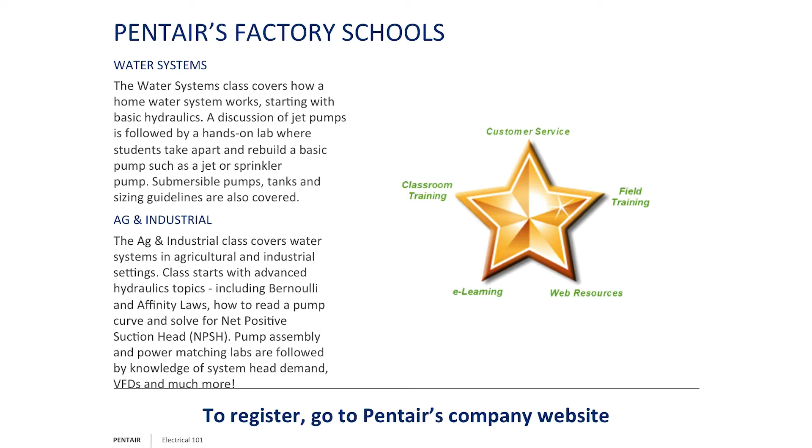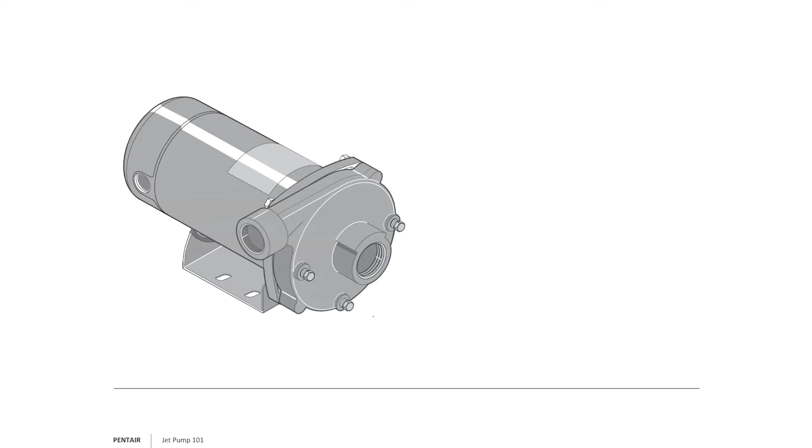Talking about jets now, let's get into the heart of it. One of the things I tell people is it's a two-pump system. You have your centrifugal, which has the impeller that moves the water. The impeller imparts velocity, and the volute case or diffuser then imparts pressure by changing that velocity. We all know Bernoulli's law: if pressure goes down, velocity probably went up, and if velocity goes down, pressure goes up. It's an inverse relationship. Remember that, because part number two to a jet is the jet package. A lot of people think this is a booster only, but understand this is a pump in and of itself. I'll highlight that later when we talk about a tailpipe.

One of the things a lot of people comment is that jet pumps are inefficient, old technology, blah blah blah. Well, one, they do serve a practical purpose -- we just talked about boosting, for example. And two, yes, they do sacrifice water to produce pressure.

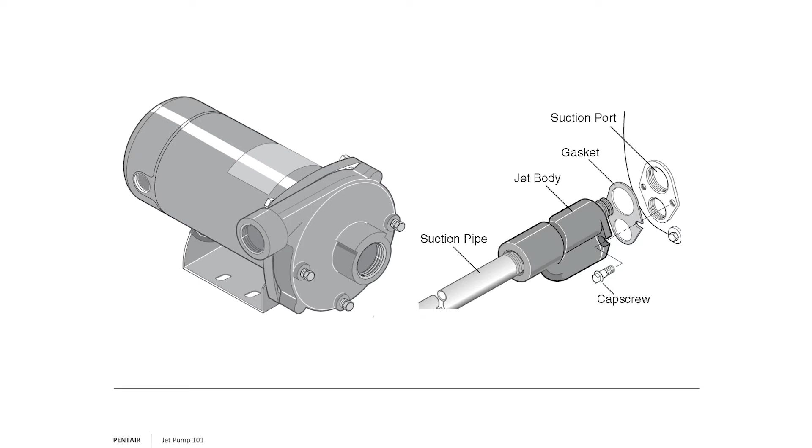Let's explain this. First, I want to differentiate between shallow well versus deep well. For shallow well, because of atmospheric pressure, we can only pull from a maximum of 25 feet. Now, I've heard some people say 27 feet -- that's fine, I'm a conservative guy, anyone that knows me knows I'm pretty cautious. So I recommend 25 feet or less.

Often the nozzle and venturi with a jet pump is built right into the pump -- sometimes it doesn't even look like one. I know one of our retail divisions, Simer, it was very hard to tell it was a jet pump; the jet was actually sideways in the body. So often the venturi and nozzle for a dedicated shallow well will be built in. If you're using a convertible pump, meaning it can be used as deep well or shallow well, make sure you have the right nozzle and venturi combination. You have to pay attention there.

Now, the other thing to remember about a shallow well pump is you really don't need that recirculation valve -- in fact, you leave it full open during shallow well applications. I've even had customers damage them -- they're plastic, I admit it freely. And if you damage them, don't sweat it. For shallow well, you can just put a pipe plug in there, don't worry about it.

When you're talking deep well, remember you can pull from greater than 25 feet, but it's going to use nozzle and venturi. You have to make sure the nozzle and venturi are selected properly for the pump, the depth to water, and the horsepower -- there are factors to keep in mind. Priming will be more difficult, and you will definitely have to use that recirculation valve. When in doubt, read the factory manual -- RTFM.

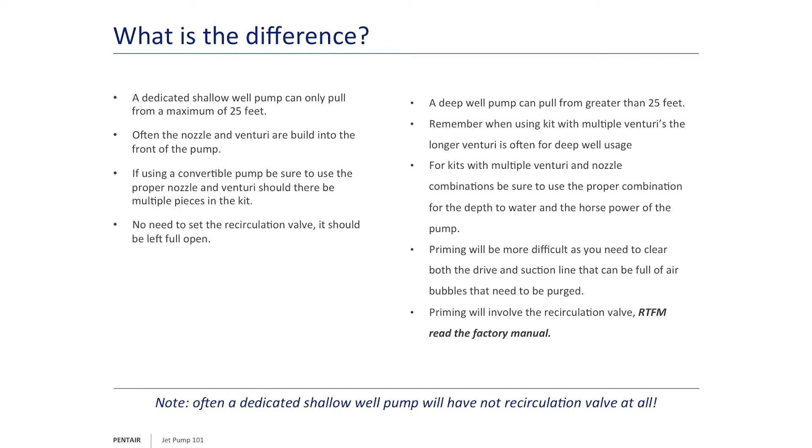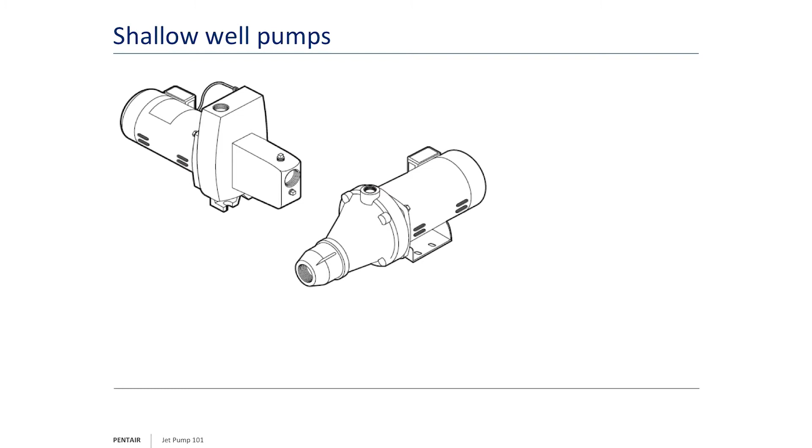Okay, now let's get back to shallow well pumps. Like I said, shallow well pumps often have the jet built right into the nose cone -- you won't even notice it. These little snouts sticking out are where the nozzle and venturi package is buried. For a convertible, on top you'll see the pressure gauge, to the right the discharge, and further right the recirculation valve, which you'll have to use for deep well, but as a shallow well you'd leave it full open. The package then bolts to the front of the pump, making that pump, until you put a package on it, a straight centrifugal.

A little note here too -- I had a customer one time who was burning up centrifugals, and it was because he was pulling water from an open body of water to a tank to recirculate it through a cooler, a geothermal system basically.

Every now and then, because the water level would get a little vortex in action, or might be low enough, or there might be some wave action, the pump would pull air, and with a straight centrifugal, it would lose prime very quickly. So what we recommended was, instead of using that little J series, switch it over to the SL series. If you don't put the nozzle and venturi in and just plug off the 1-inch, you now use the 1-inch for suction, and you basically have a J series, but the neat thing is it's now self-priming. Because you went to the S or SL series, now you have that big head shown here that has a little body of water over it, so it can recover should there be a little air or vortex in action. Makes it a better pump in that circumstance.

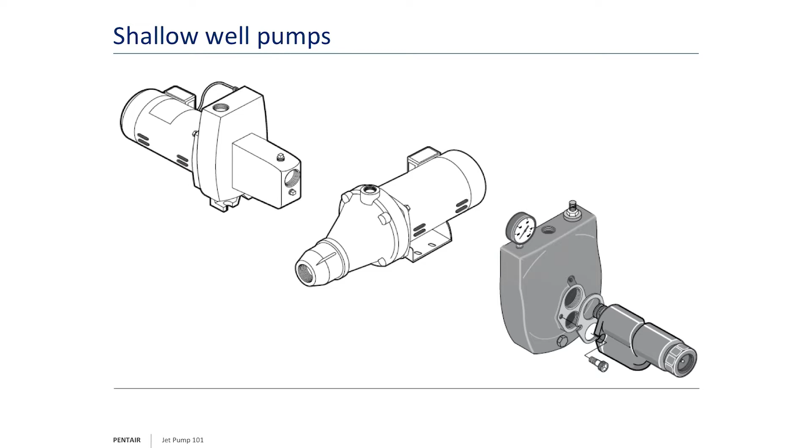So it's interesting how customers use our pumps. I always found that very interesting.

When you're talking about a jet pump, why is it so efficient? If you follow the arrows here, you notice that a portion of the flow goes to the nose cone and does a U-turn into the nozzle. At the nozzle, it's kind of like the thumb over the hose trick. It pinches the water, squeezes the water flow off so that the water jets through the next section, which is your suction, at a high velocity.

Now remember, I spoke about it earlier. Bernoulli's law says if velocity goes up, then pressure must go down. So we create a low pressure zone there that helps draw the water in more efficiently.

Then it jumps the gap, and that stream of water goes into a venturi. The venturi is kind of like a trumpet, where it starts very narrow and gets wider the closer it gets to the actual impeller. As the water travels through there at high speed, suddenly the passage opens and it can slow down. And remember what we just said, opposite relationships with Bernoulli—so if the velocity is allowed to go down, pressure goes up.

So what a jet package and a centrifugal pump are doing in connection with each other is you're sacrificing the flow—it could be as much as two-thirds of the flow. But you're sacrificing that flow to send the water down through the nozzle, jump the gap into the venturi, and effectively you can often triple the pressure or more. You can build much more pressure and pull water from deeper depths, as in a deep well example. We'll give you a better example of deep wells and how they work in the upcoming slides. So the reason we're doing this is we're sacrificing flow to build pressure.

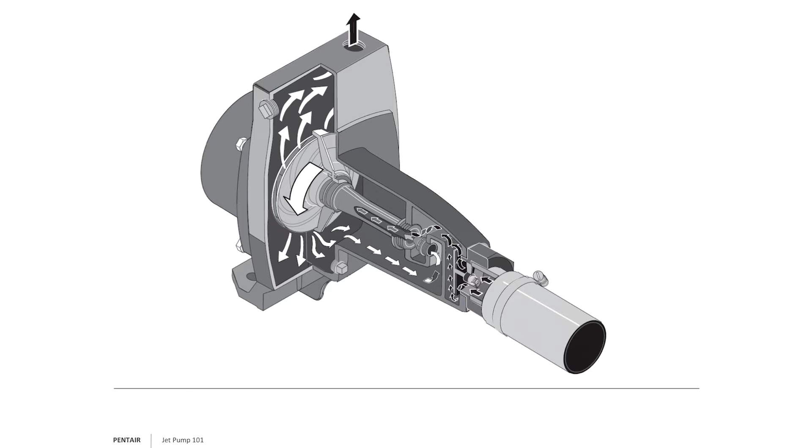Looking at the side view of a jet, you see the darker arrows at the very bottom flow from left to right, doing a U-turn into the nozzle. The arrows show how the nozzle had a higher flow at a slower rate, and they're pinched off by the nozzle, so they flow through at a very high rate of speed, creating that low pressure zone, which then pulls water in and pulls the check valve. It then goes through the venturi, which starts out kind of wide to catch the flow, but pinches off very quickly and then reopens like a trumpet to allow that water flow to go slower again. Remember, if we pinch off the water and have high flow, we create a low pressure zone. As we go into the venturi, we do the opposite—high velocity turns into lower velocity, and the pressure thus must be boosted. That's how that works.

Now, points for troubleshooting. With a jet pump, if you get it out of the box brand new, install it, and it's only building about 25 pounds of pressure, the first thing I'm going to ask you is check your voltage. Because remember, the pumps come pre-wired 230.

If you put 115 into a 230 volt motor, it runs half speed at best if it doesn't trip the thermal overload, and it only builds about 25 pounds of pressure.

Now, if the voltage checks out fine and we're still convinced that everything's plumbed properly, then if the nozzle is blocked, we're not pinching the water anymore. We're running a straight centrifugal basically. The water will still possibly flow into the pump because remember, a centrifugal pump can pull water too. It doesn't need the jet to do so. A centrifugal by itself can pull water, but it won't build pressure.

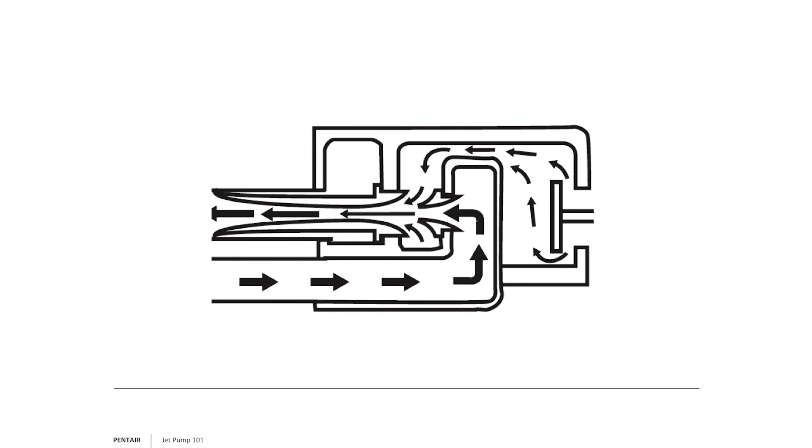So that's a tip: if you have a pump brand new out of the box, first check your voltage, then check your venturi. If this is an existing pump, say you're firing up for the 5th spring, you've had it in there for 5 years, this is your 5th season going on, you fire it up, you just can't get it to prime, you can't get it to build pressure, there's no air leaks, you've checked your voltage, everything's fine, then most likely your nozzle is blocked.

A lot of wells were produced this way with pile drivers, and they just pounded the 2 or 3 inch casing into the ground.

Now, one of the comments I'll say about this is that these are often not allowed because bad things can happen very easily. What I mean is, in one state that allows it, Wisconsin being one of them, you can still buy these at the local farm and barn type of stores. If the local code permits it, they sell them, meaning anybody, including the average homeowner, can buy one.

We literally had a homeowner that bought one of these and then was complaining about how the water was poor quality, it was even testing bad. When we asked him enough questions, we found out that this man took the driven point and drilled it into his backyard, and guess where his leach field was for his sewage system? In the backyard. Guess where he put the point? Right in the middle of the leach field, because it wasn't that far down before he hit water. So that's why a lot of codes do not permit these anymore.

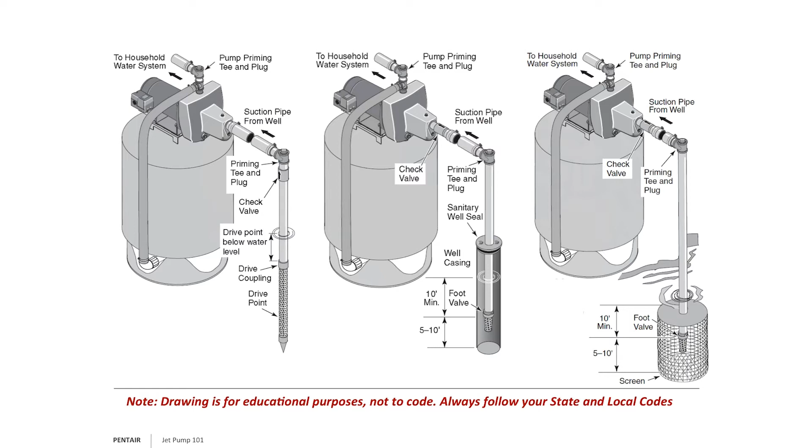Why wouldn't you install one? One customer said, Dan, you know it and I know it, I can pull out your catalog. The maximum pressure that S-Series pump can build is, say, 72 psi. It will never hit 75, which most pressure relief valves are set for, and below. So why should I install one? Very simple answer: CYI, cover your interests. You've got to protect yourself.

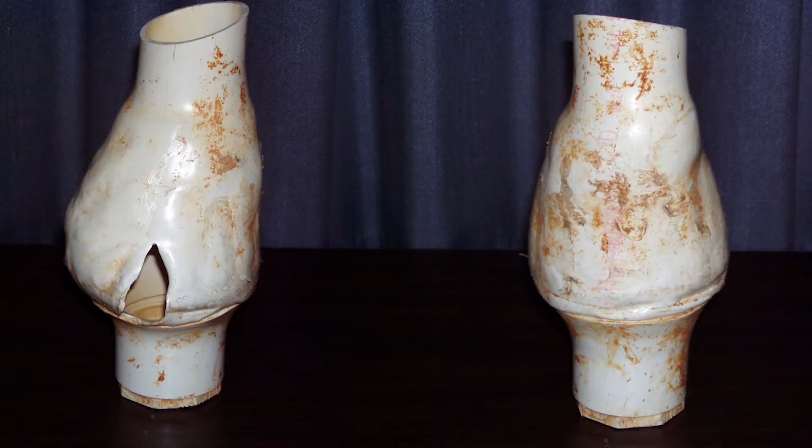Meaning this: the pump could go into a runaway condition. Initially it will only build about 72 pounds of pressure, but left unchecked, you can form steam in a pump like that. I know a lot of guys would tell me, no, not that much. And I know all of us have seen those pictures of PVC blown up like a big balloon before it blew out and the water escaped. Imagine how much pressure and how much heat is involved in there. That pressure relief valve better be there.

Because here's the simple reason why: are you going to feel ridiculous going in front of a judge and saying, Your Honor, I didn't want to spend the $5-10 for a pressure relief valve to protect the customer's home, I didn't find that worth the investment to make? Because that's basically what you're telling me. For the $5-10 that a pressure relief valve costs, it's cheap insurance.

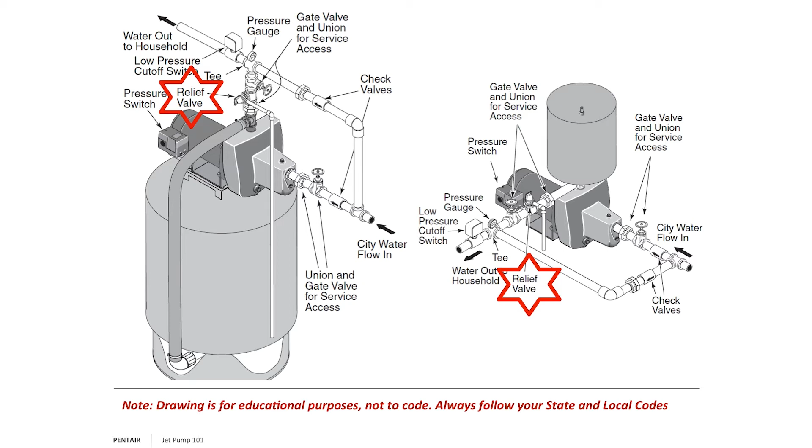Install them, even if the pump is outdoors. When I teach or I'm on the work site, I'm always telling the customer pressure relief valves, okay? Because the bad news is every year more of those things called lawyers graduate from college and they make money suing us. So let's just do that simple thing.

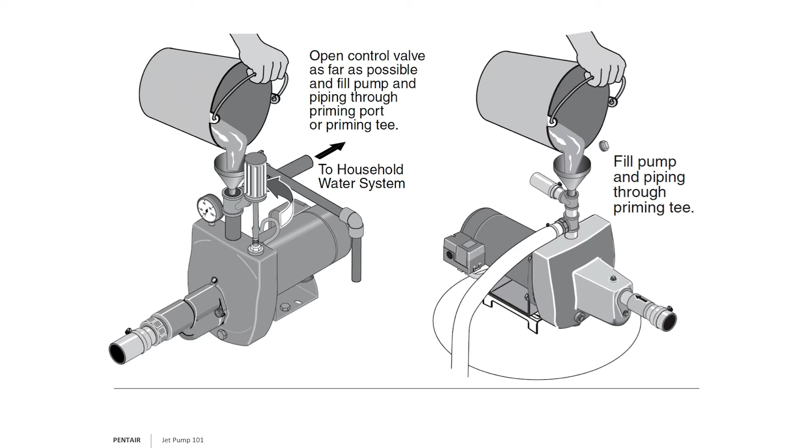One quick caution: when you prime, don't be surprised for the pressure to jump up to 50 and then drop down again and not build pressure, because often you're cleansing the pipes, pulling all the air out. It's like when you draw water from your ice maker in the refrigerator, and the glass, which is smooth as silk, you think, has all those little bubbles stuck to the side of it. Same thing happens here too.

So it's not uncommon that you lose pressure, stop it, open up the pipe plug, and the air that's trapped in the water will be whipped like whipped cream. So you'll open it, see that little white foam, pour water in until it's gone, reseal the system, and she should prime up again, no issue.

Now, you're probably wondering, why do I keep talking about multiple nozzles and venturis? Depending upon the manufacturer, Sta-Rite and Berkeley, for example, we have the CK packages. The CK package was named after a young man hired by us years ago named Corey Coles. Corey Coles was hired for the sole purpose of looking at our jet packages, which we had a huge number of, and trimming them down. What do we really need? What he found out was with a combination of 2 or 3 nozzles and a combination of maybe 2 to 5 venturis, he could cover a larger series of pumps. For the cost of those pieces, put them together in a big package with proper instructions on which nozzle and venturi to choose for the pump you're using, and sell them that way, so we had less jet packages on the shelf.

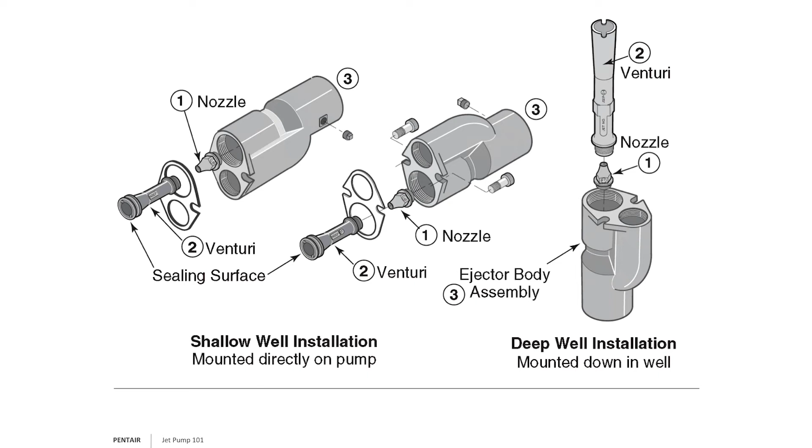Because if you can imagine, if that venturi's been in the water for some time, there's some lime and scale buildup material that might make it hard to break free the venturi. Now, I know one customer said, but Dan, there's a nut. You can plainly see it in the drawing. There's a nut molded into it where you can easily put a monkey wrench or a pipe wrench. And the answer is, yeah, you could do that too. You could do that too. But we give you a couple options on how to remove it.

Looking at the proper flow with a deep well now. And it's true with the shallow well too, but this is a deep well application we're showing here. We have the 1 inch line where the water is flowing down. That water comes flowing and crashing down and makes a U-turn, and then is pinched into the nozzle where it's forced to create high velocity.

We increase the velocity, and that makes a low pressure zone in the jet package, which creates suction and draws water in. Then that water at high velocity is shot through the venturi, which has a large opening to catch the water, but is pinched off properly to match the flow, and then opens up. That trumpet shape goes from narrow to wider, allowing the water to slow down again. Remember, velocity goes down, pressure goes up. Plain and simple, okay?

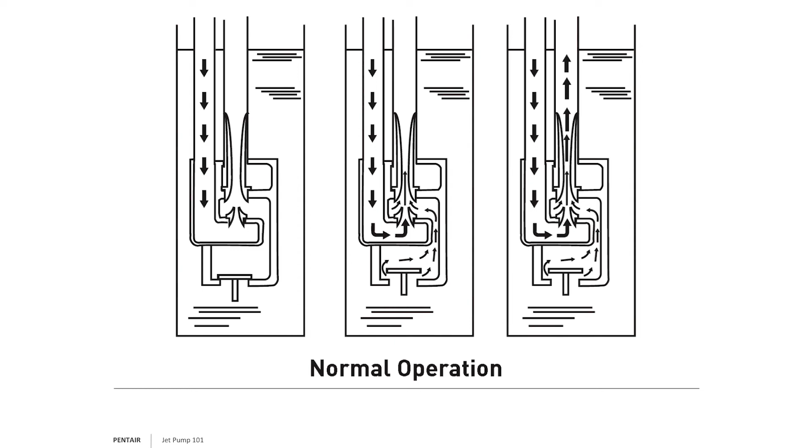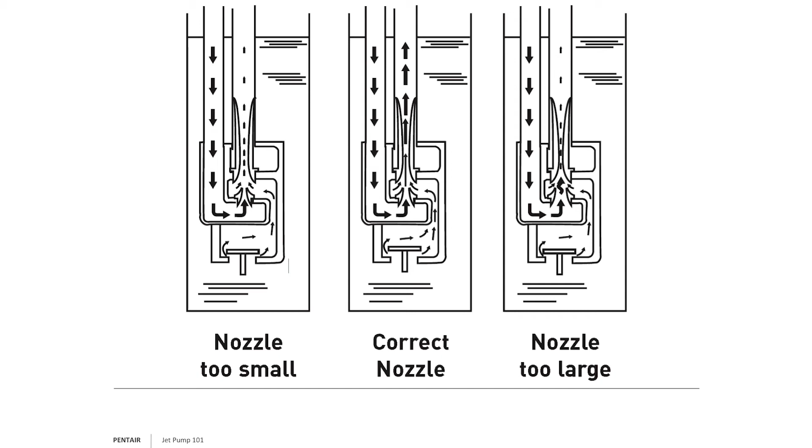So if you're not building pressure, okay, and especially if this is a brand new installation and it's a CK package, or whoever's manufacturer you're using, it gave you multiple options, read that factory manual, okay? Read the manual, because I can't think of a company that just gives you parts without any instruction. At the very least, you would hope they would give you a YouTube video or a website to go to get more information if they don't give you the actual instructions.

Looking at how these are installed for a deep well pump. The drawing to the left shows a 2-inch well package and a 4-inch well package. If you have a 2-inch or a 3-inch casing, congratulations, you have a 2-inch or 3-inch well package going down there. You're not going to get 2 pipes to go down there. And what I mean by that is physically - we have a better drawing of the single pipe 2 and 3-inch diameter on the far right here. So let's look at that drawing. What I'm telling you is there's no way I can get a 1-inch and a 1.25-inch pipe down that 2 or 3-inch pipe.

So what happens is, on the top, we have a 1.25" suction pipe and a 1" drive pipe that goes into a special elbow fitting, which connects to the top of a 2" or 3" well package system. And it uses the well casing itself as the drive pipe. So that 1" pipe flows into that elbow, and then water is allowed to flow around the suction pipe, but it's contained by the casing, and the water is driven down, does its U-turn at the jet package, comes up, and the suction pipe is now that 1.25", which is dead center, drawing the water up back into the pump.

Now, the thing to understand about a 2 or 3" jet package is they have leathers. Leather, when you put it in water, swells. So that jet package that's down there has these 2 leather cups that, when immersed in water, will swell and seal themselves off, meaning that anything above the leathers is the drive pipe that the water will come down and be forced to go into the jet package. Anything below the leathers is suction, that's the suction pipe. And you can even put a tailpipe and draw water from deeper depths - I'll highlight tailpipes here in a moment. So I want you to understand that those leathers are sealed off in place.

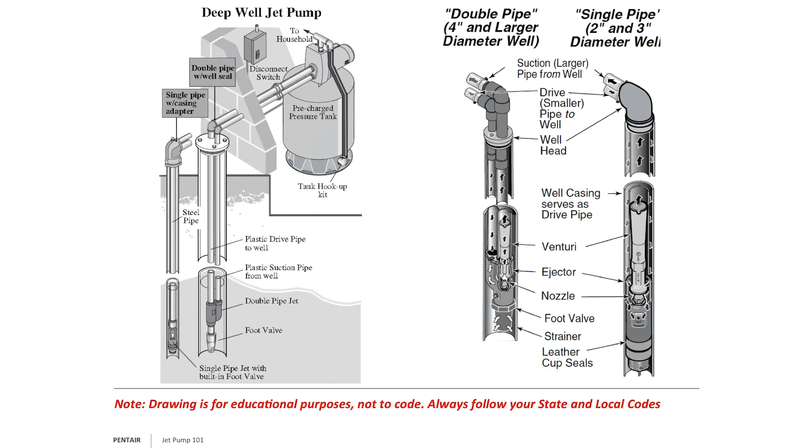Again, not to beat a dead horse, so to speak, make sure you install a pressure relief valve. I understand that most jet pumps don't build a lot of pressure, but when they get into a runaway condition, they do.

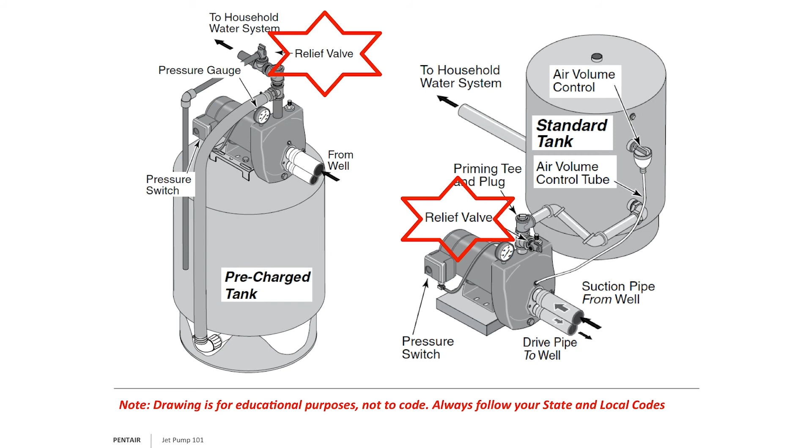Also note we do make pumps that are shallow well and convertible. The MS series, that's a deep well shallow well convertible, and the HS series. These actually have multiple impellers, remember, which means they do build over 75 pounds of pressure. So I would be cautious.

When you're priming a deep well pump, you take that priming plug, and ideally in this case, because you're filling up both pipes, I would have one at the wellhead if possible, so I'm filling out there plus inside. The key to remember is make sure you have that regulator valve open.

If you see that diagram with the screwdriver there showing you loosening the regulator valve, which you do need for a deep well, that regulator valve does two things in a deep well pump. It makes an isolation chamber so we can circulate water and get the air out, because it pinches off the flow, and it also isolates. You see that hose there? It isolates the pressure switch.

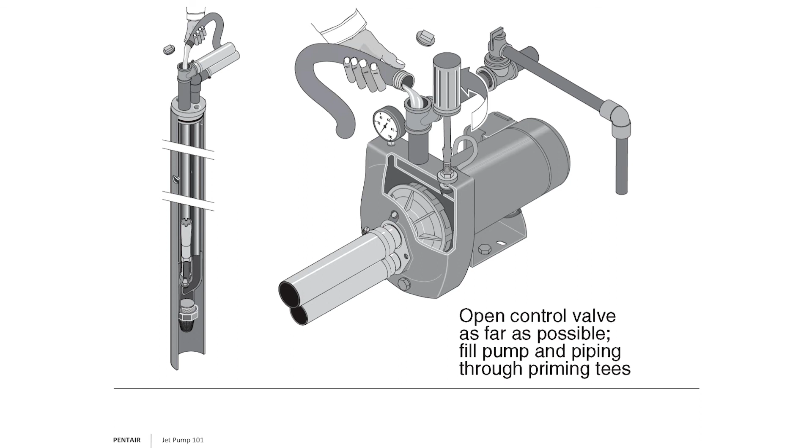So when we're purging the system and trying to get all the air out, we close the valve down here, which I'll show you in a moment. We effectively have isolated our pressure switch. So we fill the pump with water. We have that regulator valve open to make sure it flows all the way down. We then close that regulator valve, and you're going to start the system.

And you're going to start to circulate the water. Ideally, you want to see the pressure shoot up and stay up. But often with this type of system, you'll see the pressure jump up to maybe 50, 60 psi, and then it just loses the pressure, because you're flowing water, scouring out all the air bubbles, and whipping that air, and air compresses very easily.

So what you have to do is turn the pump off, take your priming plug out, open up that regulator valve, and that milky white froth, that's the air. You're going to pour more water until you get all that out, purge it, turn the regulator valve back down all the way to seal it off, put your pipe plug in place, turn it on, and it's going to build good pressure. That's what we're looking for.

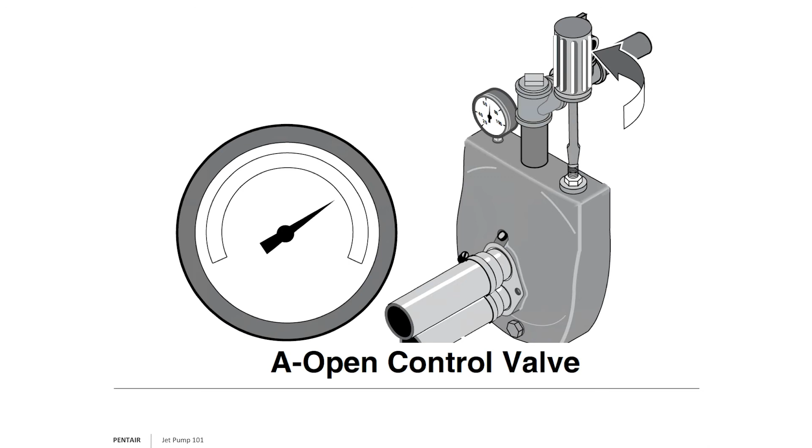You want to shoot right up to maybe 55, 60. When you see it's holding, it shoots up and doesn't dive right off again, then you start to open up that regulator valve slowly by turning it counterclockwise, to the point where you want to see the pressure gauge needle start to bounce and vibrate. That tells you you're at the sweet spot of flow, and you give that regulator valve a quarter turn to seal it off.

Now, I'll tell you my experience, and maybe it's because we're in Wisconsin, we don't have very deep wells. What we do is open it, and if we open it all the way, we have an amp meter ready, and we read the amps on the motor. If, for whatever reason, you can open up that regulator valve all the way, and you're still drawing water, and still hitting 50 psi and turning off clean, because you're really not that deep of a well, check your amps, make sure you're not overamping the motor.

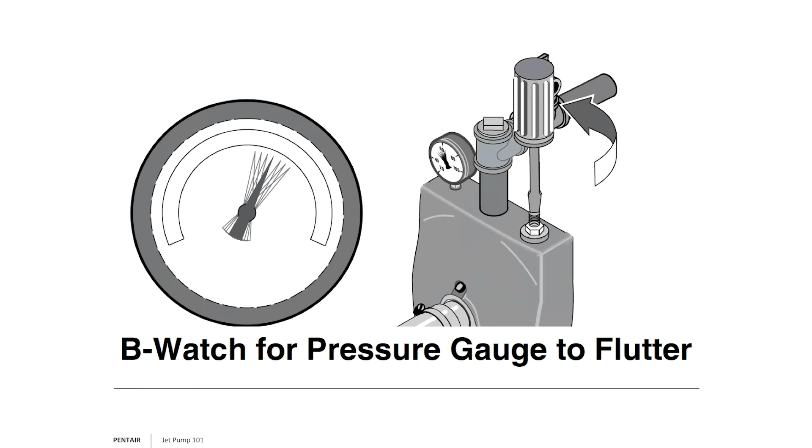If you are, then close that regulator valve down a little bit to change the flow and the production, and often the amps will come back down. So that's where you always double check your amps. Don't just trust this needle right off the bat and consider the job done. Always proof the amps is my personal recommendation.

So like I say, if you're lucky enough to get that valve to bounce a little bit, close that valve back down a bit so the needle stays rock steady. Check your amps, and if you're good on amps, you're good to go. You've primed the pump.

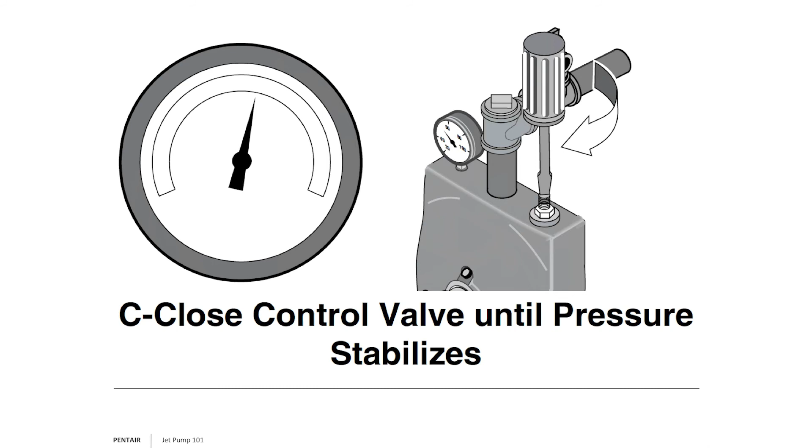Now, where this is often used is in areas where they might see a drought condition. They might punch a well 160 feet, and in the spring, the water might be at 30 feet. So they buy a pump, maybe a 3/4 horse, maybe even a 1/2 horse, and they set the jet package down to about 60 feet. Because when they looked at the jet package combination to the horsepower, say that 3/4 horse, they saw they should be getting 10 gallons per minute or better at that 60 feet of where they set the jet package.

Now, I said at spring they had 30 feet of water. It's early spring, everything's thawing, water's flowing freely. March comes along, April, May, and you start to get into the drier season, and the water table drops, but not that much. It now settles out to about that 60-foot mark where they're getting 10 gallons per minute. But then the drought hits, July, August, and the water table drops.

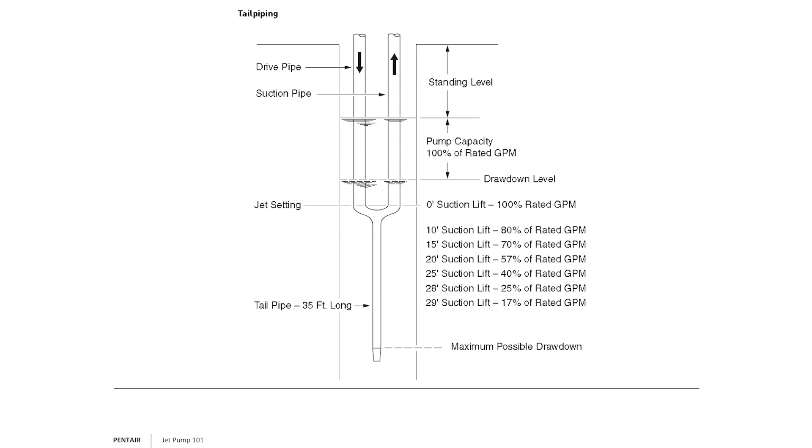And that's where you as the professional work with the customer and get multiple tanks together, or maybe a storage tank, but you do something so the customer can learn how to budget his water. So they know, for example, in the morning, if they're showing 50 psi on the pressure gauge, the tanks are full, and with 120-gallon tanks, you have roughly 35 gallons of drawdown in each tank. That means you have 105 gallons of water to work with in the morning for showering and such. So the customers learn to live with the system. But you can provide a better system by providing the tailpipe in certain circumstances.

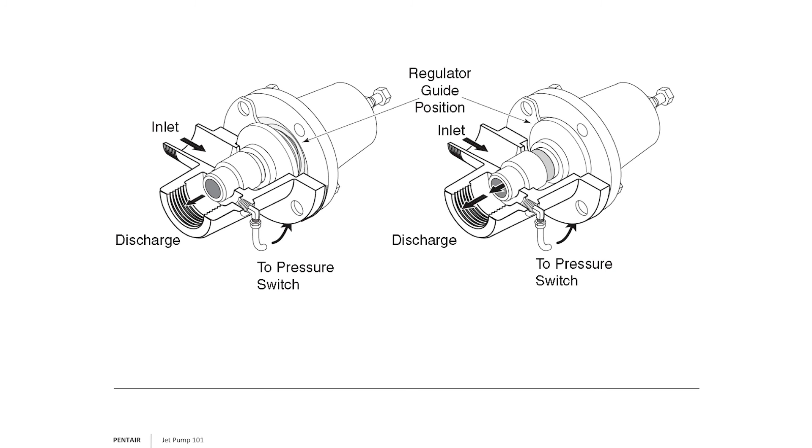When you're looking to prime a pump with a regulator, our Myers brands often have these. In the Sta-Rite and Berkeley, it's the HMS and MS series that have a regulator. It has a little nut on the back that compresses this plug. I want to caution you, if you look at this drawing, you see where the pressure gauge is and it goes into that bushing. Even though it's going into a bushing, that's not much of an opening.

In the drawings we'll show you, it makes you think that opening is very big and you can pour water freely from a bucket very quickly into it. And no, you can't. So I want to caution you and understand that in this type of situation, you definitely want to put a priming plug somewhere in the plumbing that has a much larger opening, say a 1-inch opening, to make it easier for you to fill. Because these are multi-stage units sometimes, and the HMS and MS series can pull water from 300 feet, so you could have 300 feet of pipe to fill. That's why I want to make sure you understand that.

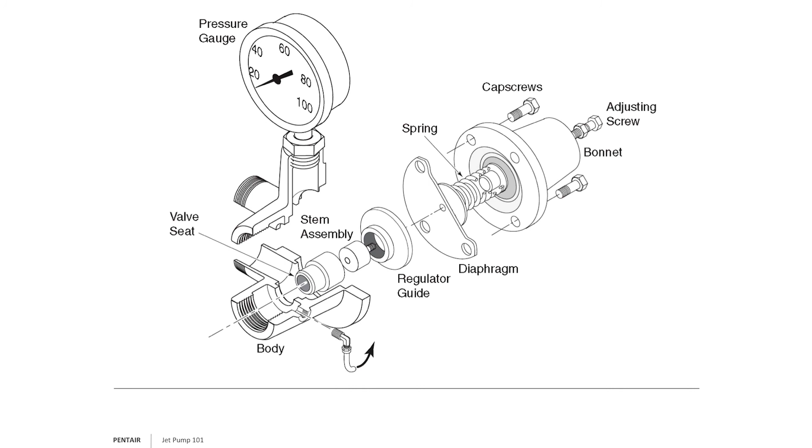So you open this regulator to fill water into the system. We're pouring it in there, and if you see that drawing on the right, it makes you believe you've got an opening that's probably about 1 inch or 3/4 inch in diameter compared to the pipe. That's where I'd recommend, where the arrow is on that drawing, on that discharge pipe, I would put a pipe plug there with a 1-inch T so I could pour water in much more freely than through that smaller opening.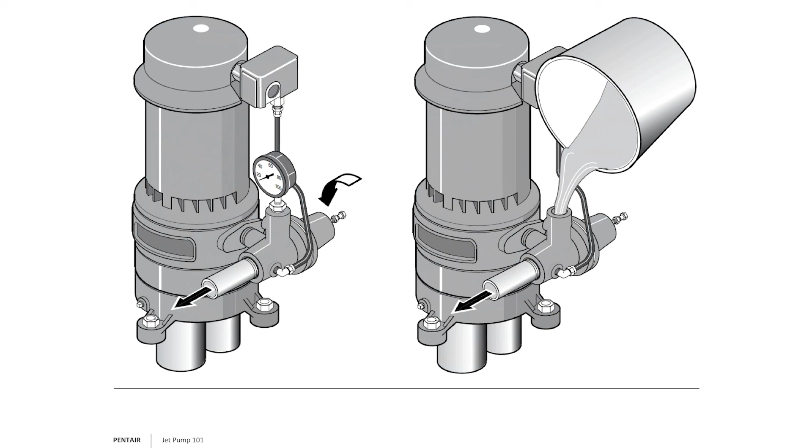So we have the valve open. That drawing on the left shows we open up that regulator valve. We're letting water flow into the pump and down into the 2 pipes into the well. Once we fill them, we close that flow regulator nut down all the way, and we turn on the pump, and we're going to see the pressure jump up right away. If it dies off again, you probably know why — it's because we have that air issue, so you might have to purge it a couple of times.

But we want to see the pressure shoot right up, and you have to watch the multi-series jet pumps because that pressure can jump well over 70 psi, so be careful. As it jumps, you start to back off the regulator so the pressure gauge needle drops down, and you keep opening it until that needle starts to vibrate again. When it does, give it a quarter turn to steady it. But again, break out the amp meter, see where you're running on your amps, make sure you're not going over the service factor amps — you don't want to overamp the motor.

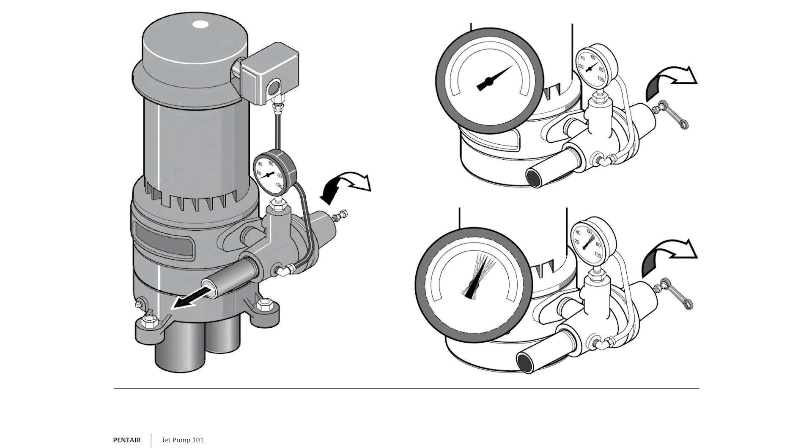So I proof it both ways, by the regulator or the pressure gauge, and then the last thing I'd always do when the pump is running is watch my amps to make sure I'm not overamping the motor. You do that quarter turn, the needle steadies out, you check your amp pull during the flow, and make sure it's running properly.

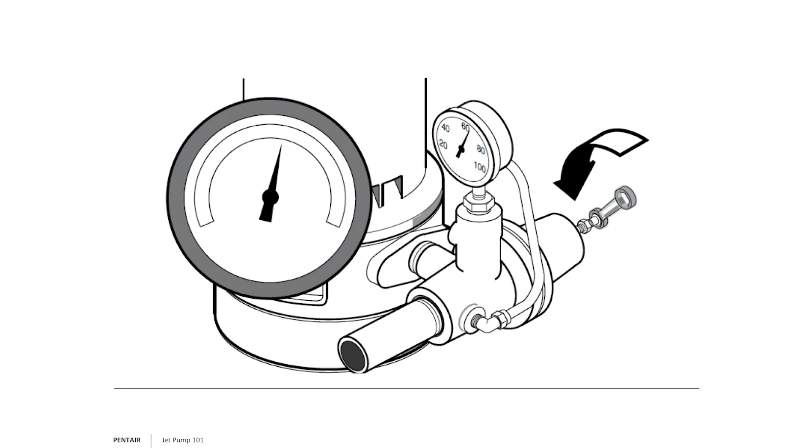That sounds nice and easy, but I work with customers out in the field, and one of them gave me a shortcut. He said doing it that way, you can multiple times have to stop, drain out the air that's trapped in there, and try to keep repriming it. His trick is, in the drawing to the right, you'll see the mounting nuts or bolts that hold the pump down, and at the 7 o'clock position, right above it, there's a 1/4-inch NPT plug. That's your pipe plug to drain the pump for the winter.

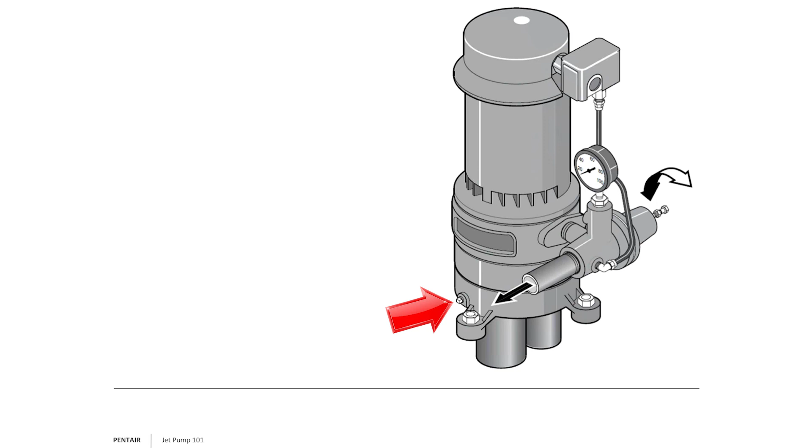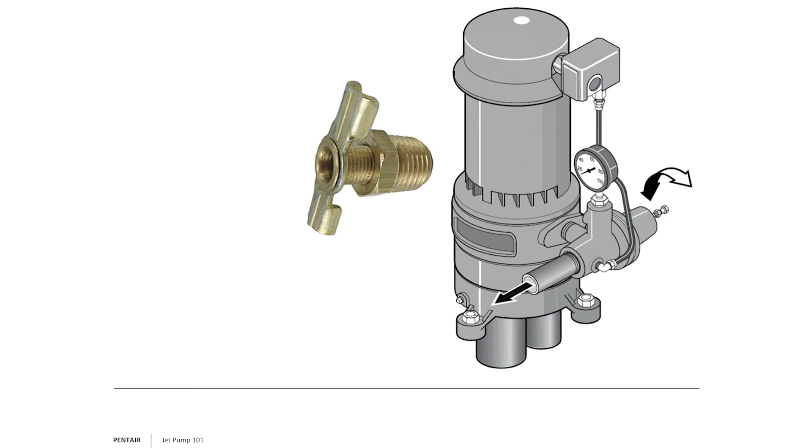Take that out, and he puts in a drain cock, which threads in there so you can open and close it to make draining very easy. You can also do his trick where he takes a bayonet fitting and a length of hose, puts the bayonet fitting into the drain cock, puts the hose onto the bayonet fitting, and then runs that hose into a 5-gallon bucket of water.

So as he fills the pump with water and is about to turn it on to start priming, he opens up that drain cock a bit, so now you're pulling from both sources. Sometimes you'll see he does this because you're pulling more reliable water and helping displace the water and air better. Often, by using this trick, he can prime it up the first time. That's just a little trick I learned in the field.

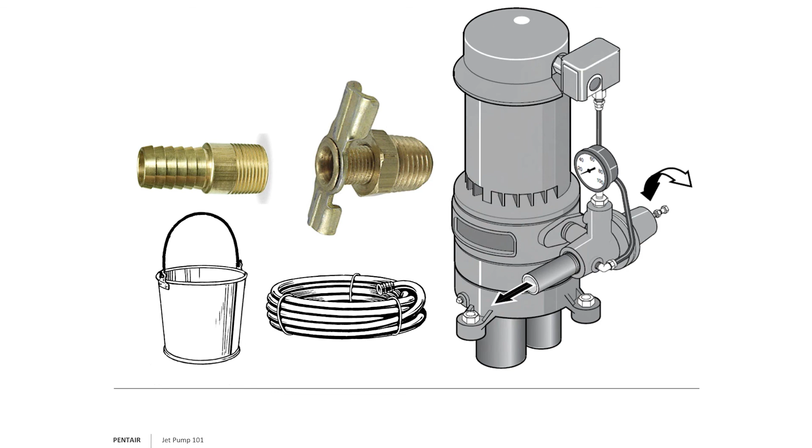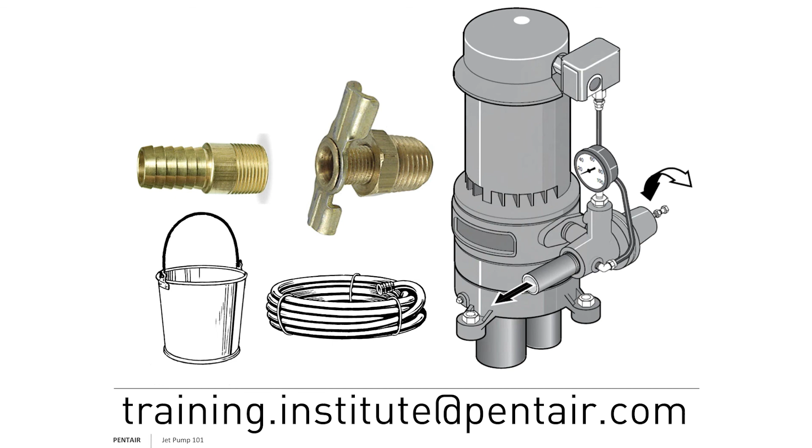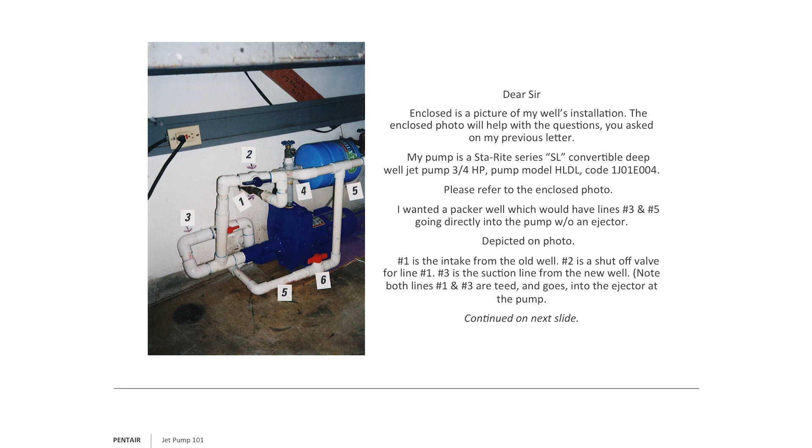Number 2, remember a deep well needs a jet package down in the well with flow going down and suction pulling out properly. That pump, which is a convertible, is our SL or HL series. The jet package can be on the nose or down in the well, but it can't be both, and he's trying to do both here. Creativity is great, I don't want to stifle it, but don't try to cheat the system like this. You just can't do it. Either you're running a deep well or a shallow well, not both at the same time.

And last thing too on this drawing, that many fittings, you're begging for an issue, water hammer and loss of pressure and such. So watch your fittings, okay?